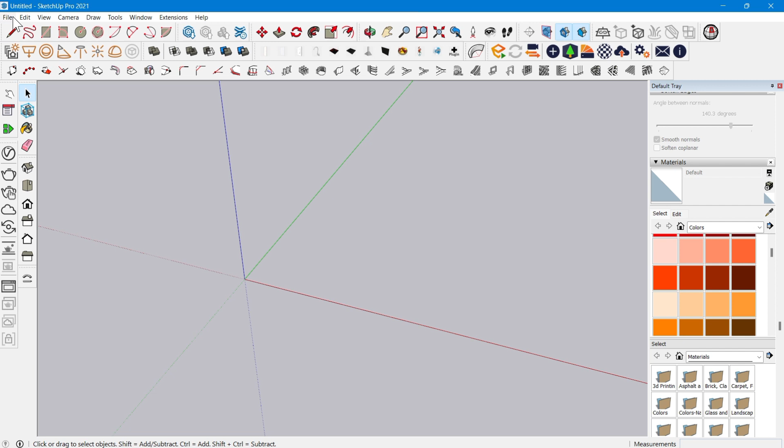As you know, we can create a 2D plan and then import it into SketchUp to create further 3D modeling. In the same way, we are going to import this 2D sofa which we have created in AutoCAD, and then start working on its 3D basics.

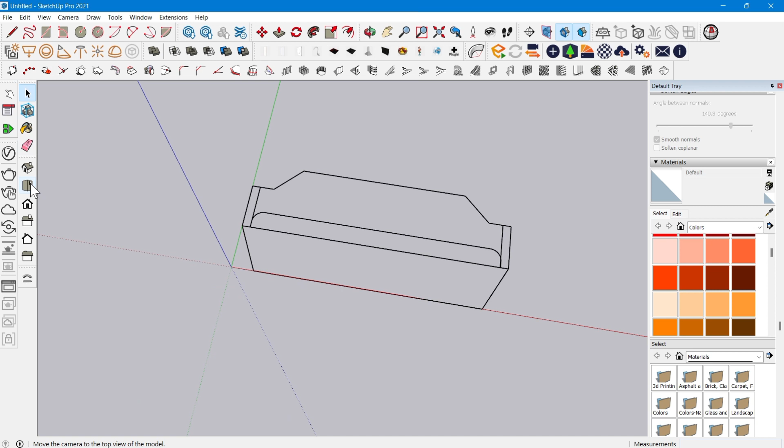So this is the 2D, you can see it. We have a different type of sofa. We are going to create a new type of sofa, and its shape is going to be a little bit different.

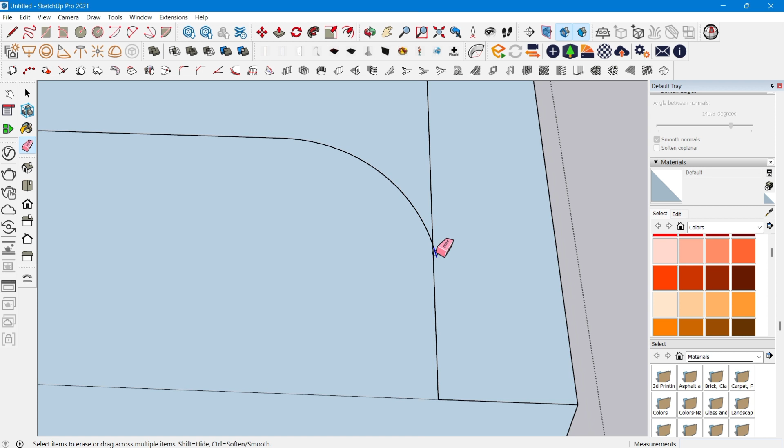So the very first thing is you have to create its surfaces. Until you don't create its particular independent surfaces, you cannot extrude and create its cushioning, its side pillars, its main base. So for that you need to have separate surfaces.

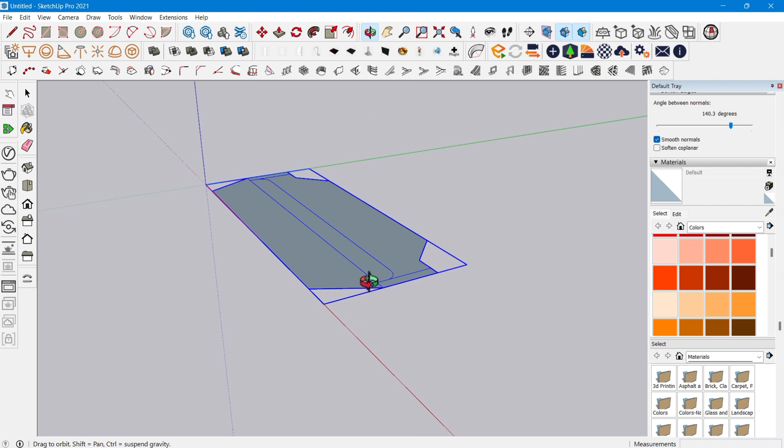As you can see, this is the surface, this is another surface, so we have independent surfaces for each. With the help of this, we will first rotate this for the front elevation, and then we are going to start its 3D modeling.

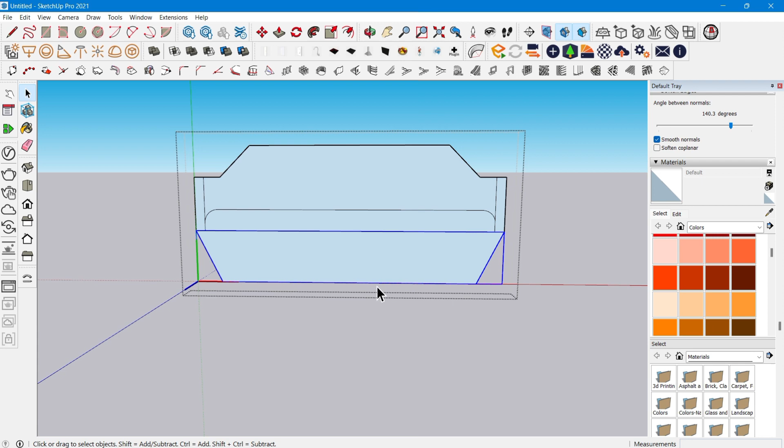So now first we are going to extrude, or push pull, its base by pressing P. But first we are going to make it as a group. So we'll press P and we'll pull it at 2 feet.

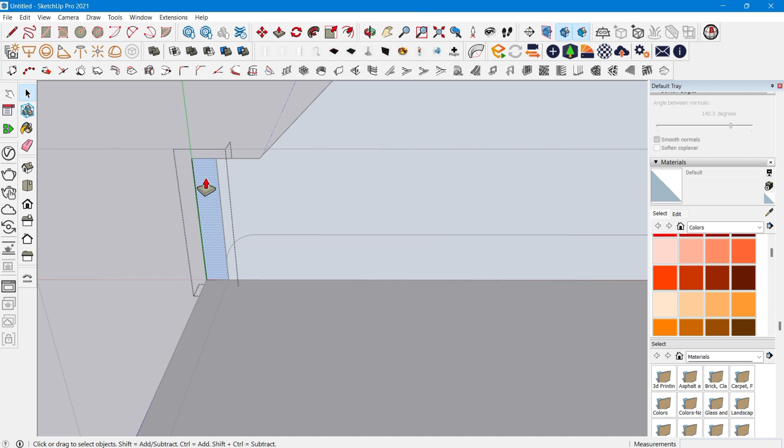Then we'll click on this surface, make it as a group, and even make it as its side plank to keep your hand or rest it. If you want to rest your hand, these pillars are useful for that.

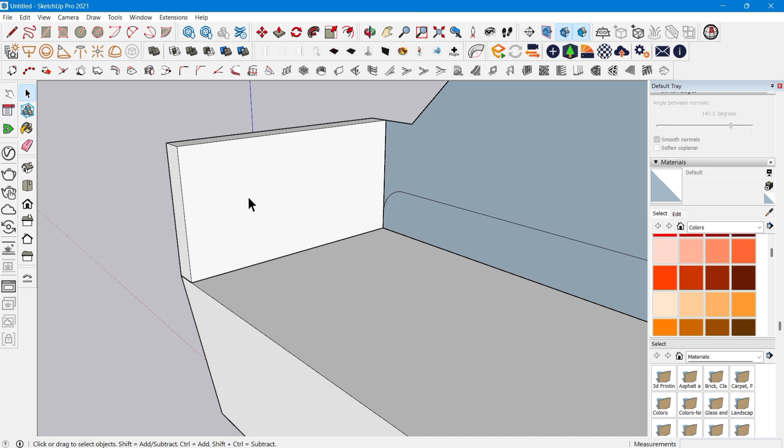In the same way you have to create such a thing on the other side, but we'll select this one first. Now I want to add some rattan net structure into it. I'll press F and give an offset of 1 inch, and then delete this surface. As you can see, such a surface has been created.

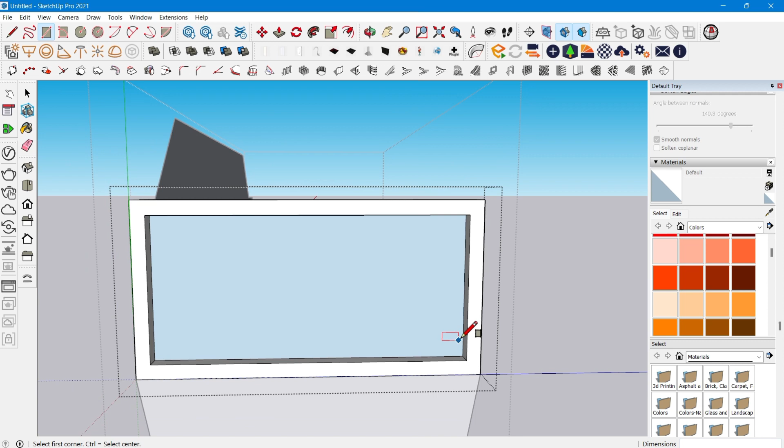Now I'll take a rectangle and create such a surface that I can give rattan net texture. I'll copy this on the other side as well. So now these are my resting boxes where I can rest my hands.

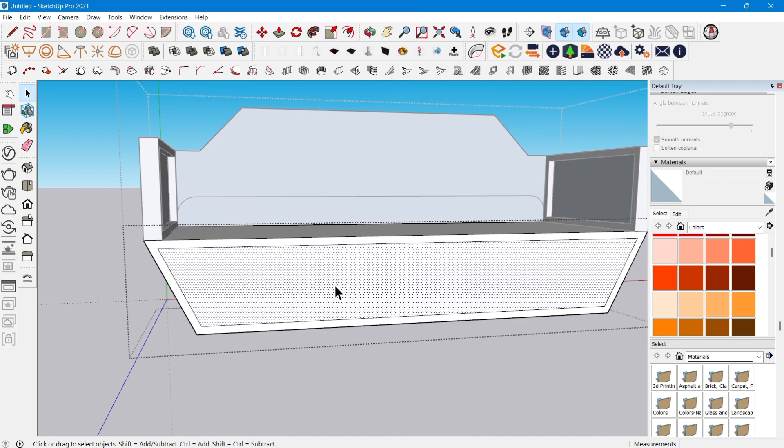Even I'll give an offset of 1 inch over here, a little bit of depth or detail work you can say. I'll enter 0.5 inches.

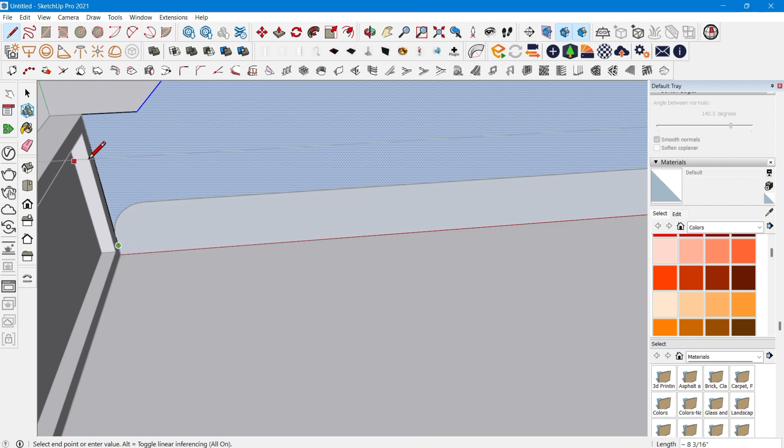Now we'll work on the back portion, the resting portion. For that you need to make it a group, and I'll draw a line over here so that this part will be an independent surface. Even I'll draw a line over here, so now this is our independent surface.

Now we'll make it as a group and push pull it at 18mm. It will be our ply thickness of 18mm. As you can see, this is the ply thickness, and now we have to give its cushioning.

So we'll press F for offset and give its cushion offset. Before that, we'll move it on the upper side and below a little bit because gaps may be visible. Just a second, I'll do it again. I'll press F, give the cushion, and just bring it down so there are no gaps.

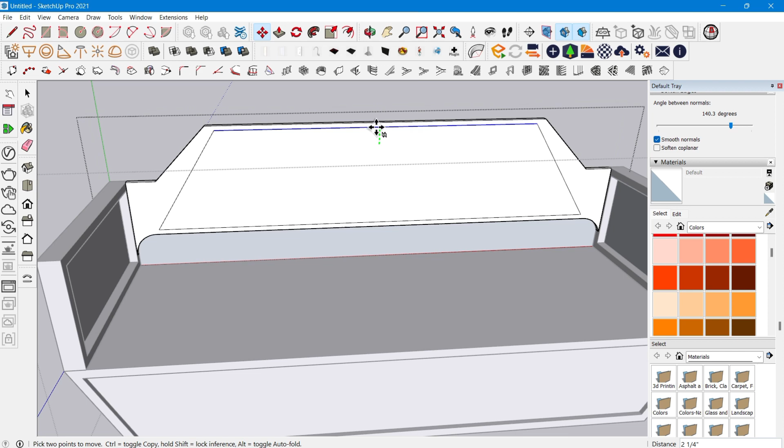Again select this line and move it a little bit up, then select this portion, make it a group, and pull it at 2 or 3 inches, the thickness of your cushion. In the same way, for the sitting cushion, I'll make it a group first, then press P on my keyboard and pull it out at 2 inches.

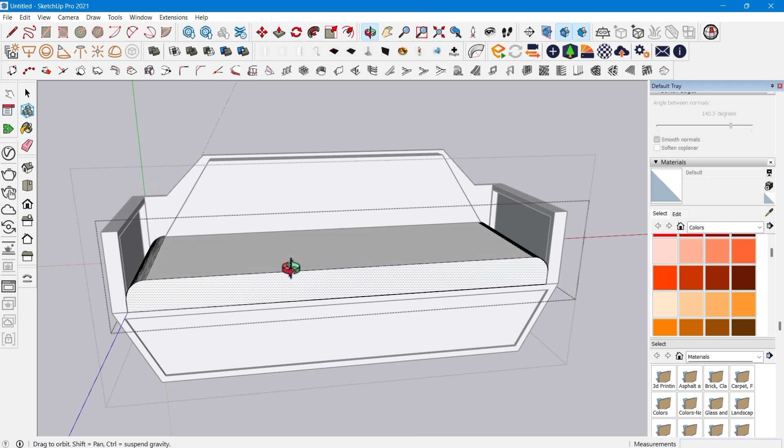Now you can see I have my sitting cushion as well as my back resting cushion. Now I'll make it soften edges. This helps me to not use the Clothworks plugin, which charges some amount. So this is the free method to do it.

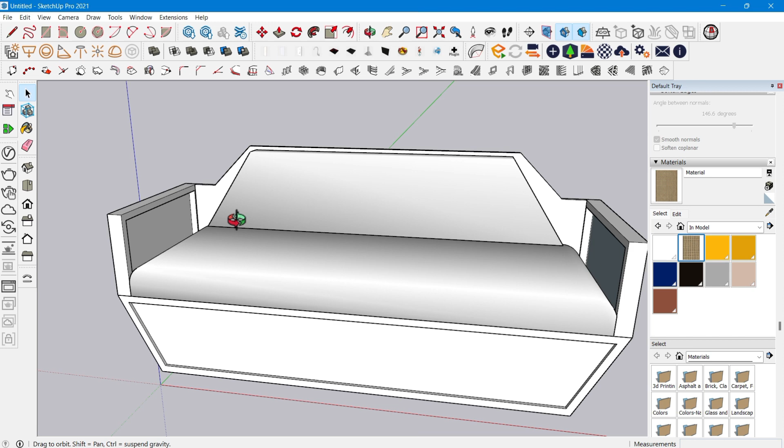Now we'll add some materials to it. The first thing is I want to add rattan, because I'm creating a little bit like an Indian contemporary style sofa, you can say. So we'll add some rattan texture to it. As you can see, if you search such images, you can see such types of sofas designed by many people.

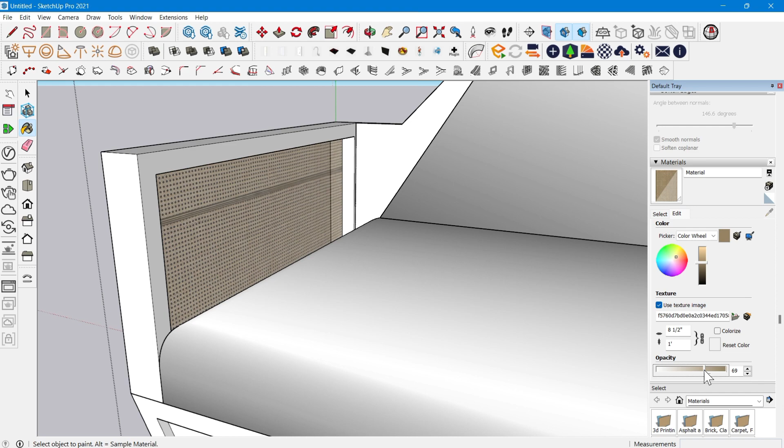So we'll decrease its opacity because it's a net. Remember to decrease its opacity, and also change its texture height and width, because there were some lines in the image. Now it is clear. Yes, it is looking nice.

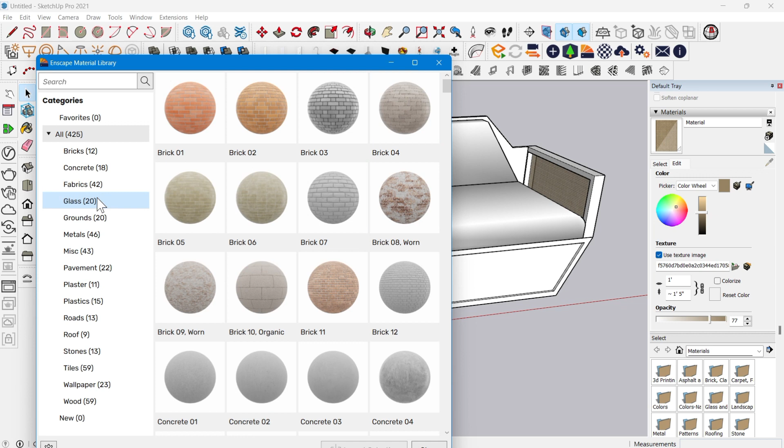Now we'll add the wooden texture of our sofa. So I'll go into the Enscape material library. I'll go into fabrics first, because we have to give the fabric texture too. So I'll select this fabric, import selection and close.

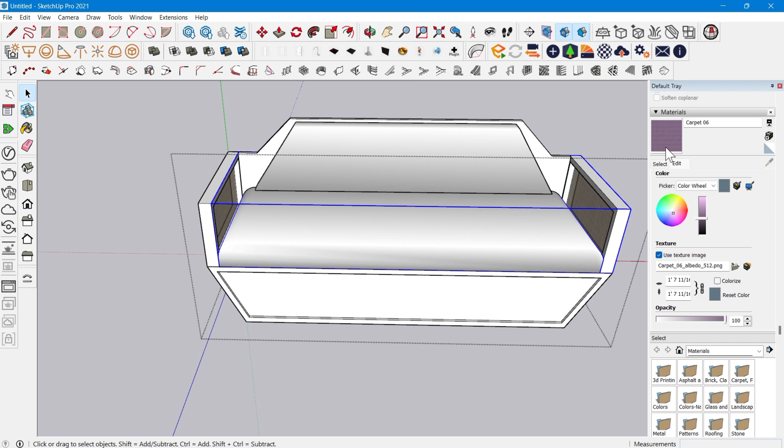Now we'll first check which color is very good for our fabric. I think purple. I'll give it to my sitting cushion and the back resting cushion. Yes. We can change its color later on if you feel the color is very dull. Yes, I think this color is really very good.

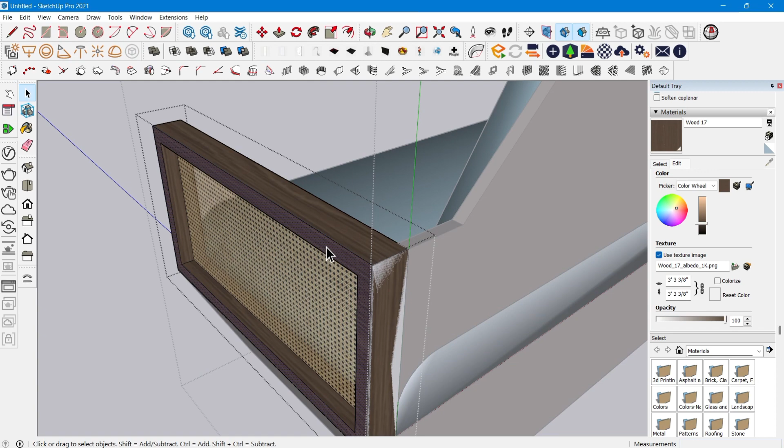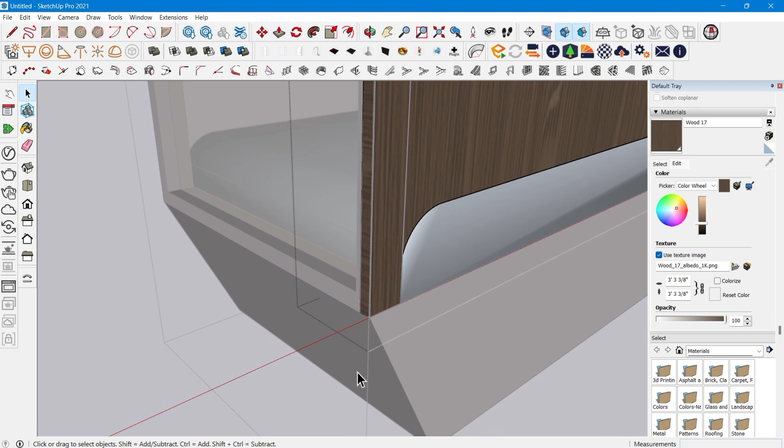So I can see a glitch surface, so I'll just repair it. It's nothing, just overlapping surfaces - if you see, such faces have been created. So I'll just clear it. Yes, it's done. If you observe such overlapping surfaces, it's easy to remove, but make sure you look over your model from all sides so that you can clear it at the very basic time.

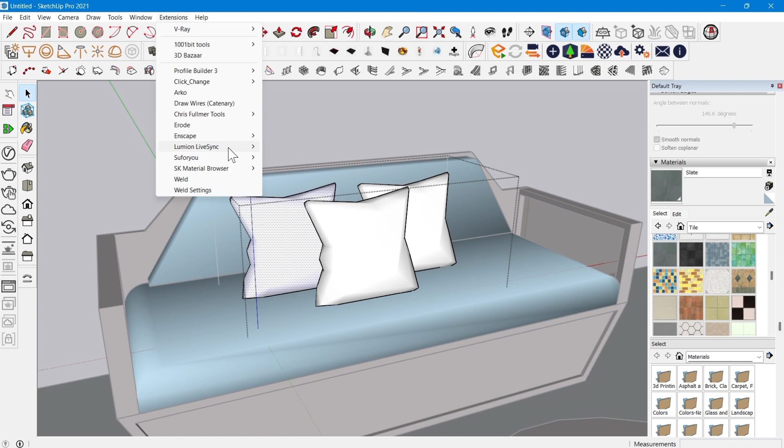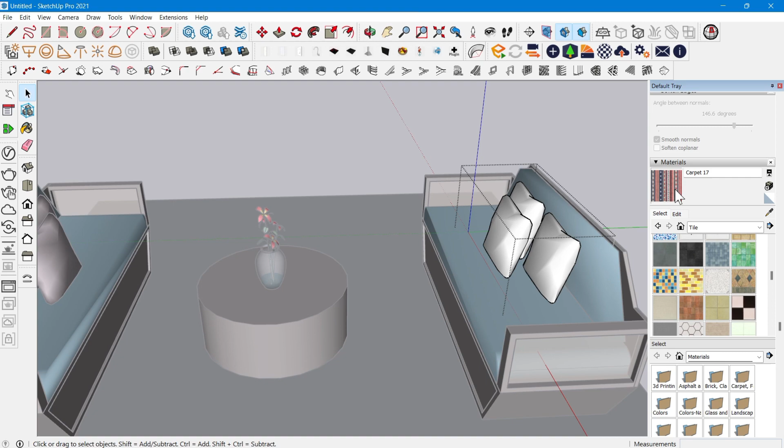So I have added some cushions later on. Now we'll add some texture to our cushions as well, which will give a very nice look to our sofa. I'll add this texture, import it, close this section, and give this material to our cushions. Look how beautifully it has come up. The design is looking very elegant, and it is creating the realistic sofa feeling. It is not like a box type sofa.

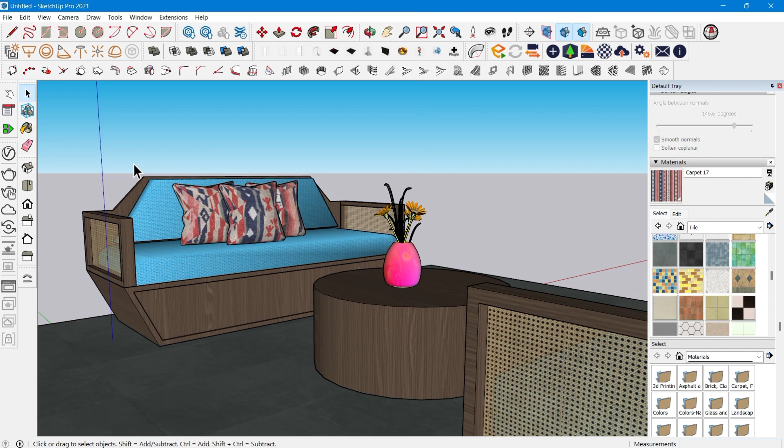So this sofa we have created without the help of Clothworks. It is not necessary to buy a lot of plugins and then work with the help of plugins. You can also work with the basic parameters which are given, like line, shape, etc. Like soften edges - if you're working on your cushioning part, you can choose to make its coplanar soft. So there is no need to buy very expensive plugins to make your detailing very detailed. You can also work within the parameters which are already default ones.

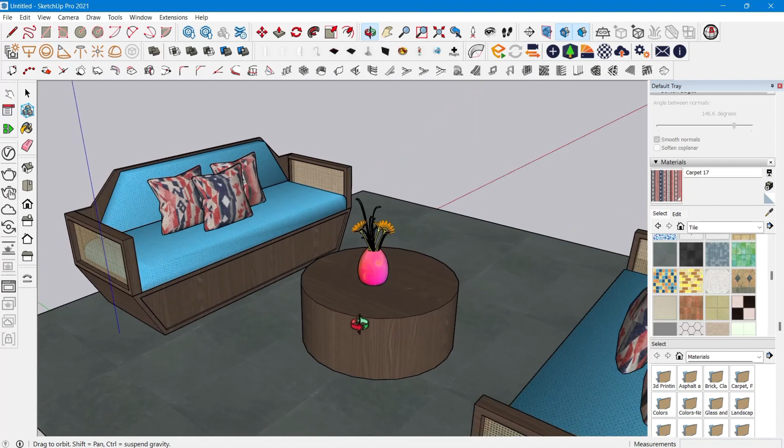And as you can see, the sofa shape is a little bit different one. You have not seen such sofas. So thanks for watching. Goodbye.